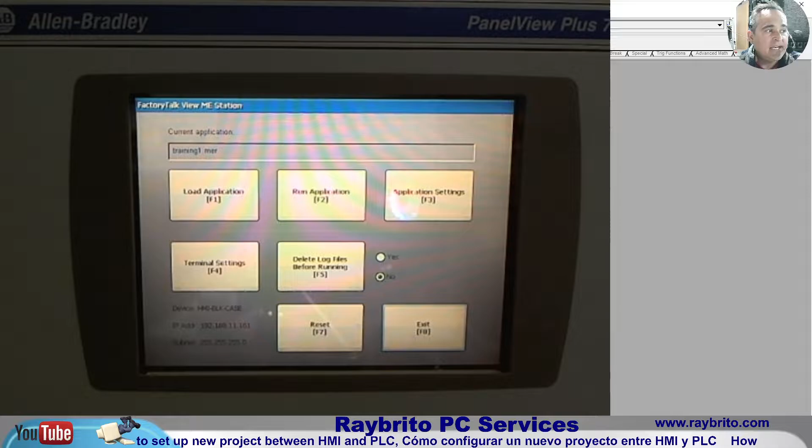Hi, what we're going to be doing today is how to set up a new project between an HMI and a PLC. Of course, it's going to be an Allen Bradley. As you can see in the screen, it's going to be a PanelView Plus 7.

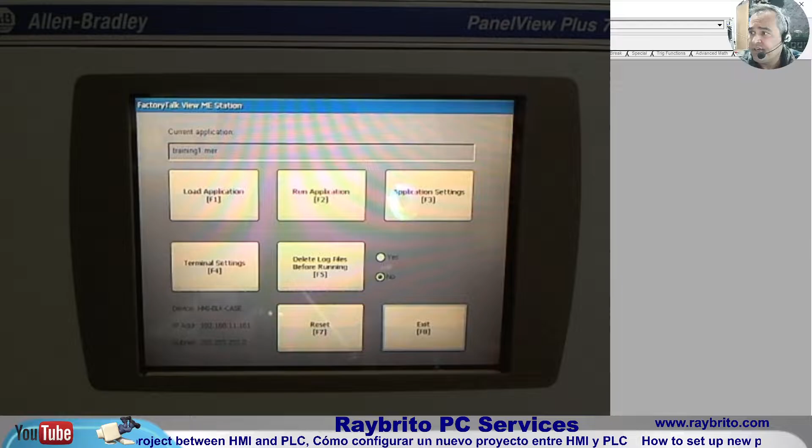Let me remove the HMI screen from there. Okay. Now after I remove that HMI screen, I put my ugly face there. Hey guys, we're going to be working with the program, or the project, or the code I did a couple days back.

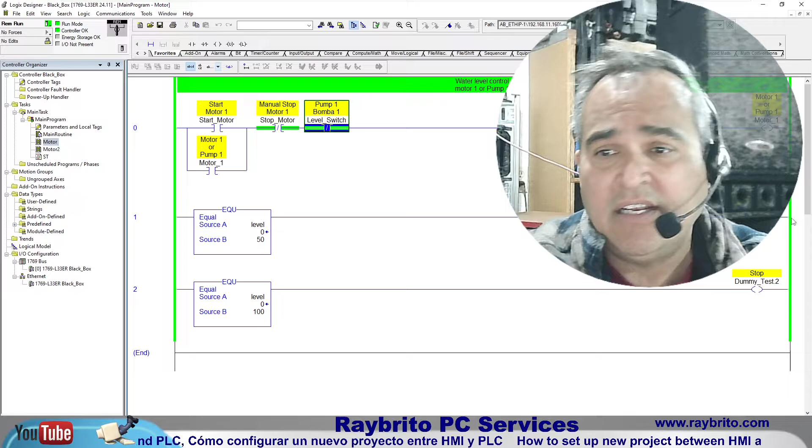We make some changes. The lines at the bottom, they're nothing. So, let's put something. Okay. Let's change this code here a little bit.

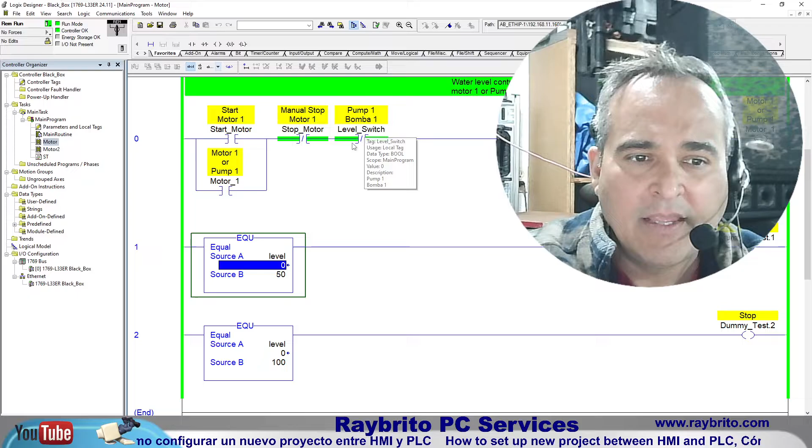Face, ugly face. Let's change the code a little bit. With the level switch here, it's down here. Okay, that way it's a lot easier.

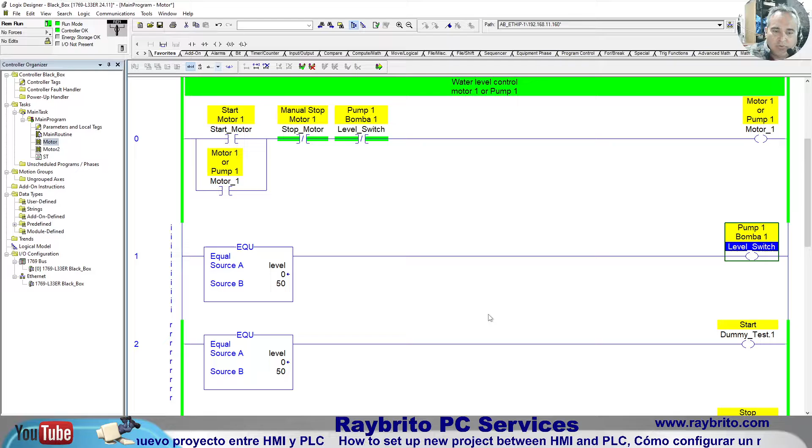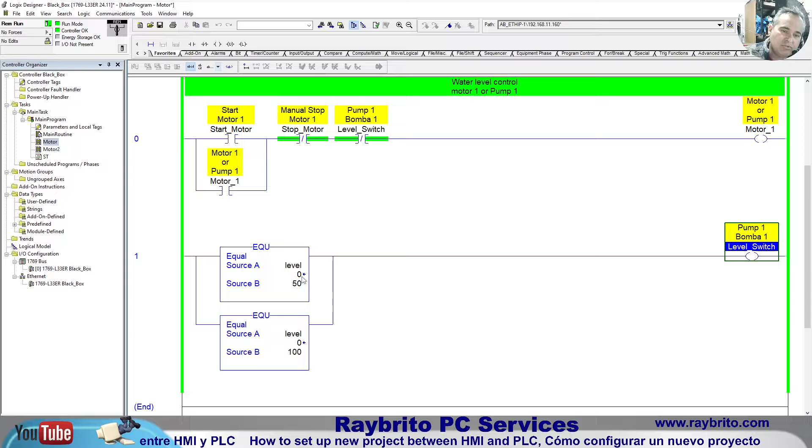Let's put branch, level. Back there. That one. And basically that is all. What I'm going to be doing is something simple. Just mimic. This is the level switch. When the level switch trips, stop the pump. But the main idea here is to use the HMI.

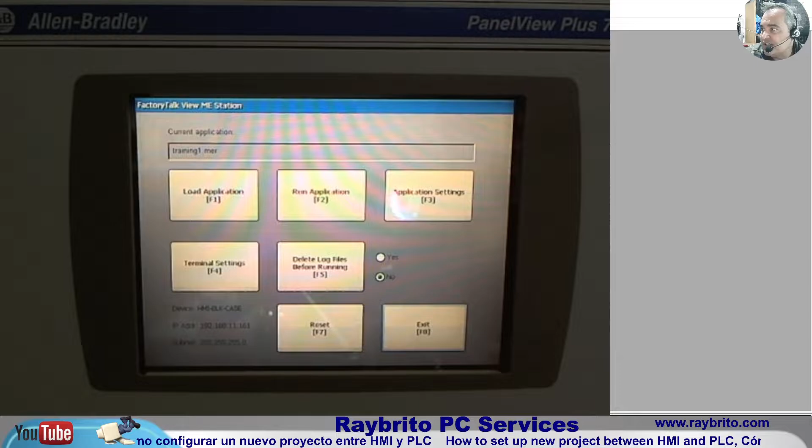How do I do that? Oh, here it is. PanelView Plus 7. You can barely see it in the right corner, it says PanelView Plus 7.

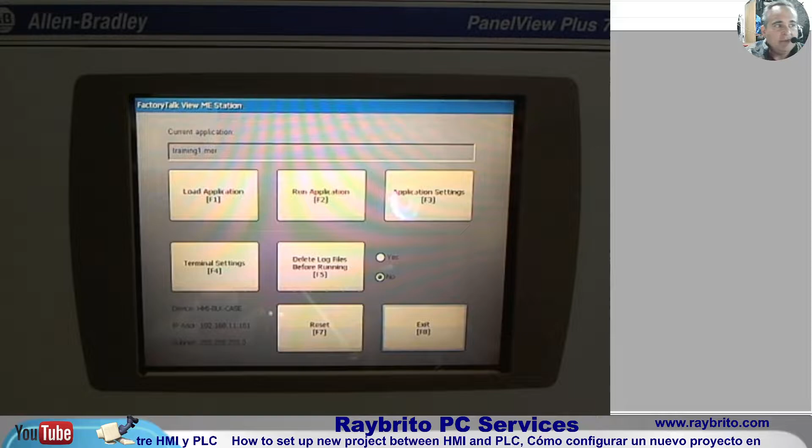Loading. Let's change that screen from there. Okay. There you go. Loading application. There you go. Okay.

What I like to do first is make the communication, which obviously should be done first, right? What we're going to be doing right now is making the communication. Okay, let's click on FactoryTalk Linx.

Communication setup. To prepare the communication, we double-click on setup, left button. Let's create a new application. Finish. Here we have the communication tree.

Let's click on the plus, then we will see all the devices. We've got to give it some time, okay? Sometimes it takes about a minute to load everything. Put this there. We already know that this is 161; how I know that is because back in my HMI here... Sorry, I didn't put the screen.

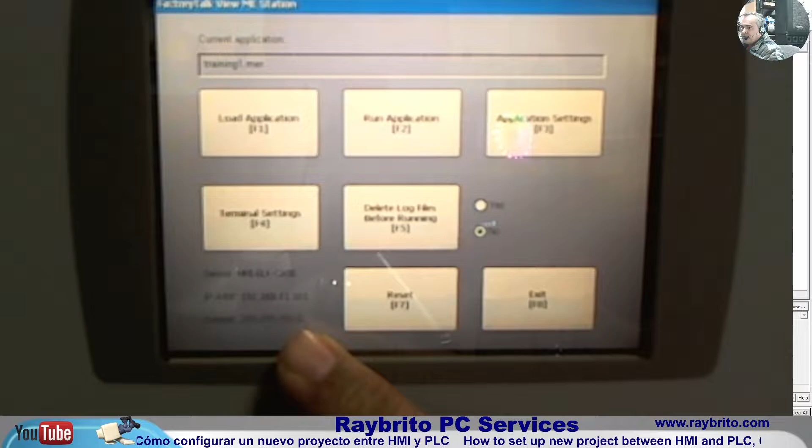Okay, back here, we got a 161, okay.

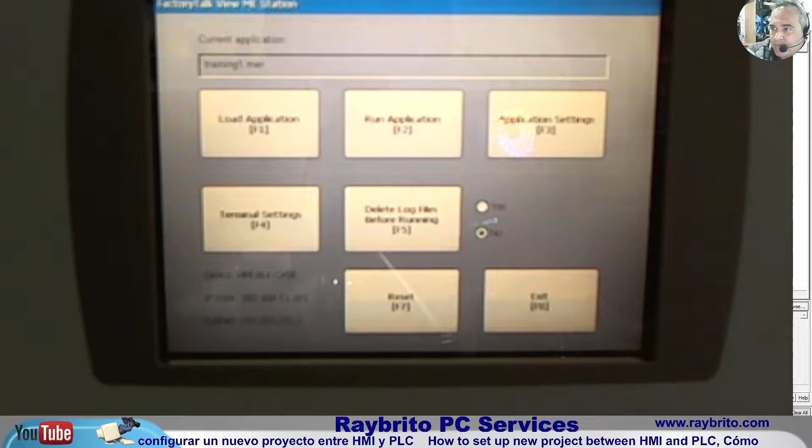As we know, I got two HMIs right now, the 152 and the 161. But we're going to be working in the 700. The other one is a 1000.

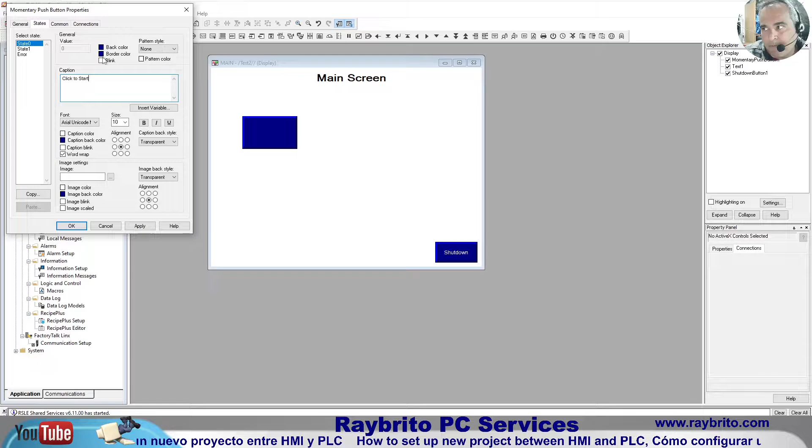0 is going to be the blue. Green is going to be state 1. Let's make it bold. Let's leave it 10. But let's change the color. Let's put it black. That way it's easy on our eyes. State 0 is fine. Let's just put it bold. There it goes. Okay. Now we got started.

And now let's make the communication back here. If we want to change the size, you change it here. Ok.

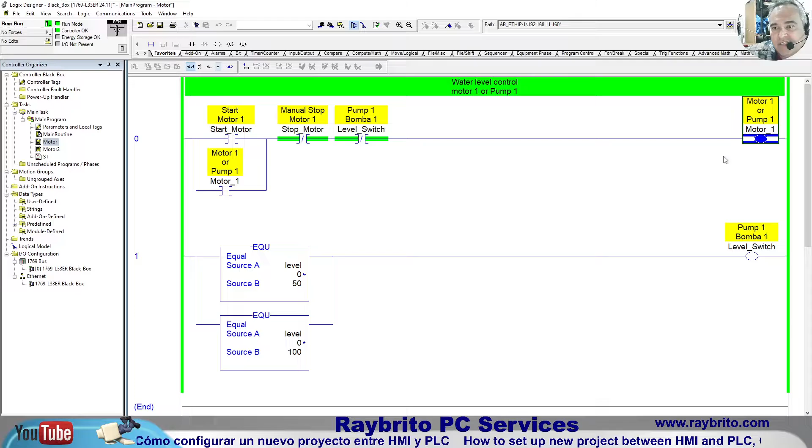Motor 1. Now it's motor 1. That is what's going to be my feedback, okay? Apply. Okay. Now, let's minimize this one a bit.

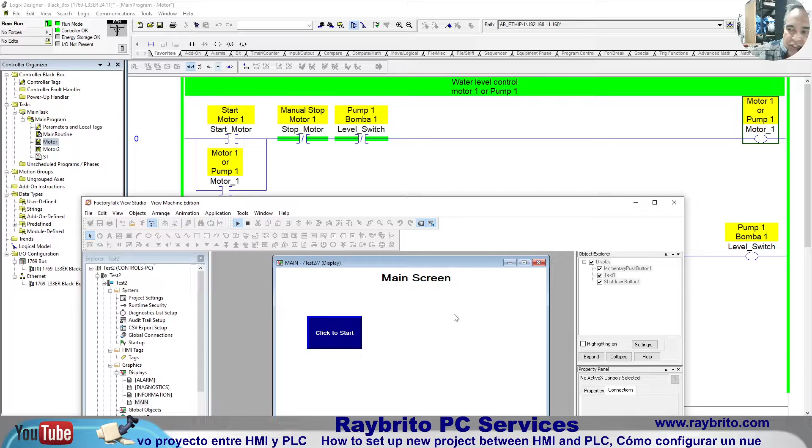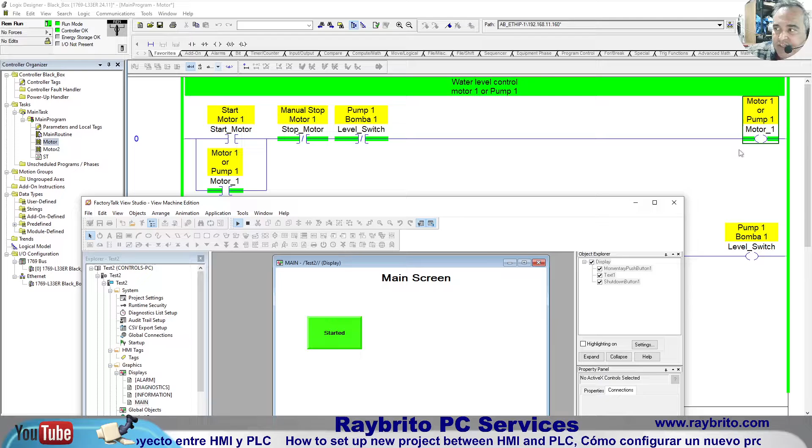And play. Now we hit play. We're ready to go. We save it. Good to go. Now this is for testing. Okay, let's click start. Bingo. You can see here it started. Okay. It doesn't matter if we click it again, because it's already started.

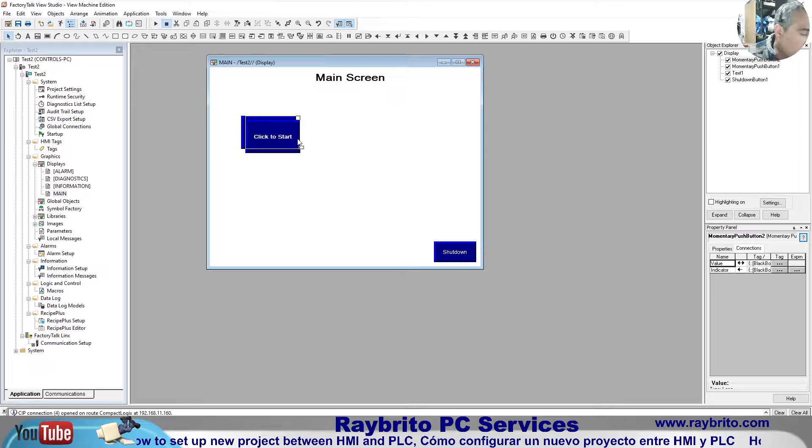What I'm doing here is something simple. I'm keeping the mouse over the icon I want to move. I'm pressing shift and the arrows up and down or left and right to move it, okay? Now double click on it.

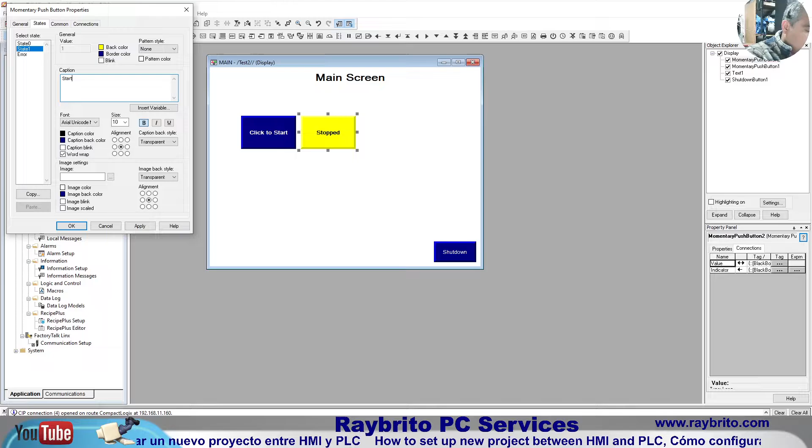Let's make the communication. This is the feedback. Let's leave it there. Let's delete that one. We're going to be doing motor 2. Stop motor 2. How I know that? Stop motor. Okay. Stop motor. Always double check, okay? Stop motor. There you go. Apply. Okay.

Now let's test it again. Save. Remember, always save your work, okay? Click play. Motor started. Now stop. Now we need the little motor here, okay?

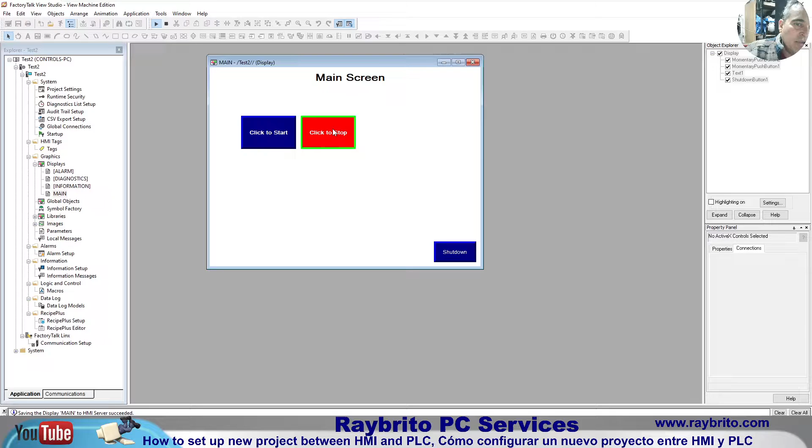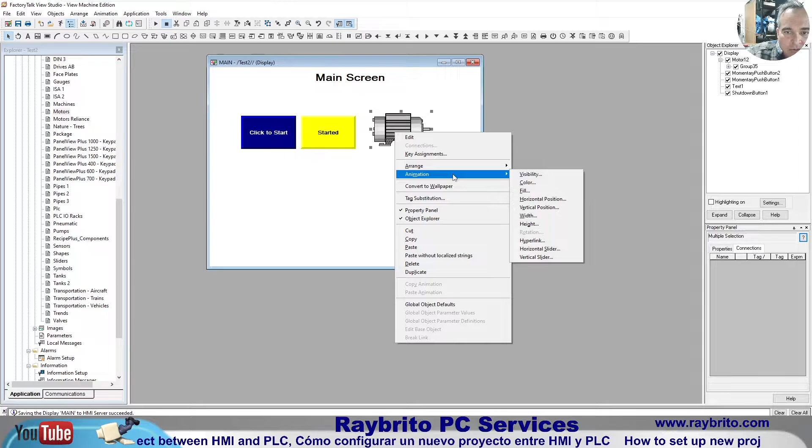In case we're gonna add some flavor, let's put the little motor here, okay? Let's go down here, library. Let's find motors. Double click on it. Let's grab this one here and let's drop it there. And close it. Okay. Let's do right click. Animation. Let's see what happens. Nothing happens, okay? Let's do animation, okay?

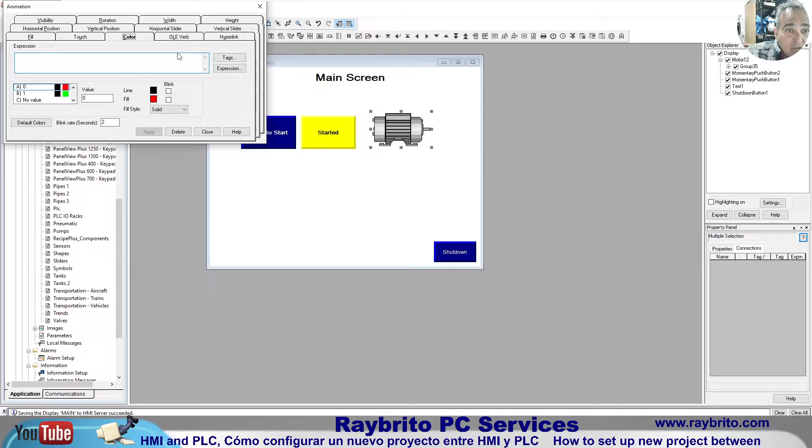Visibility. Let's go to color. Let's find the tag. The tag is going to be motor 1. Click OK.

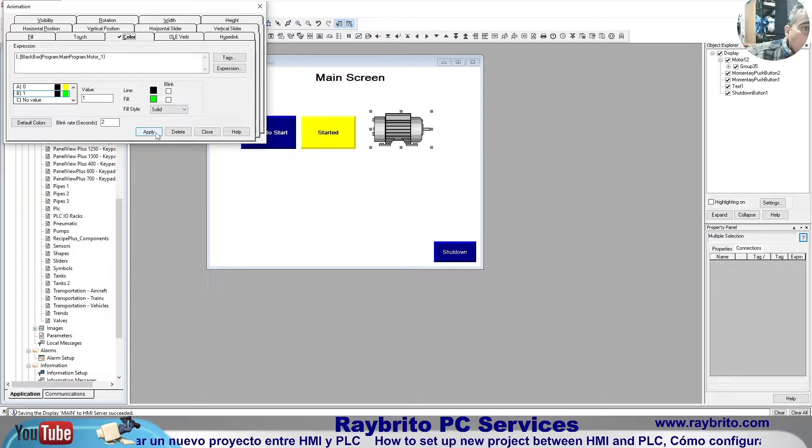Here we change the colors. When it's stopped, let's put it yellow. When it's running, at 1, green. Okay. Apply, close. Let's test it, see it works.

Remember, if you keep forgetting about saving it, just remember this. What Jesus does. Saves. Save your program. Always save your code, save your work, okay? It only takes a second.

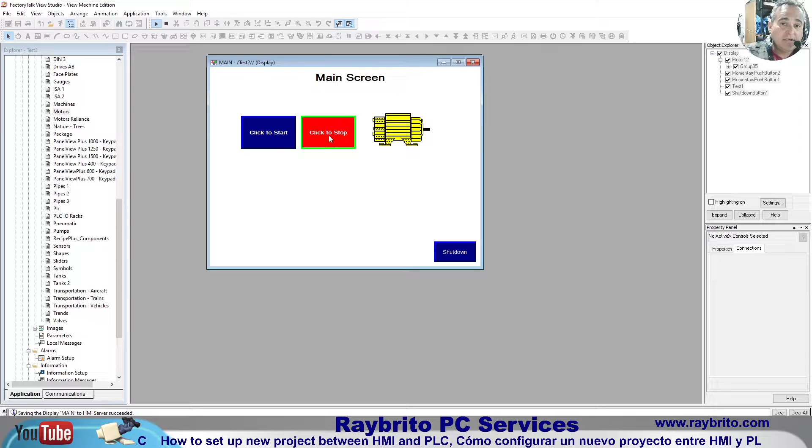That simple and easy is this. Nothing more than that. Okay? Start, stop. Okay? You can see it here. Simple and easy. Start, stop, start, stop. When it's green, it's because it started. Otherwise, it's stop. We can see it here.

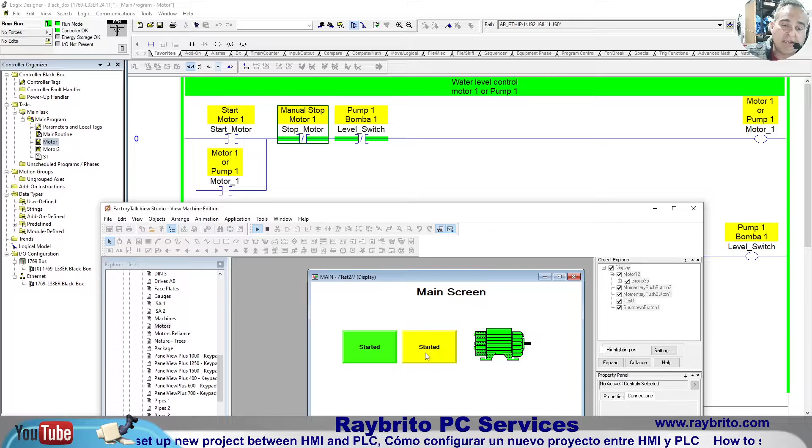Okay. Now, let's say we want to add more things, but we don't want the buttons to be showing here in the screen. Let's say too big, many things. Let's do some animation. We want to see this button only when... let's do animation. Visibility is what we're going to do.

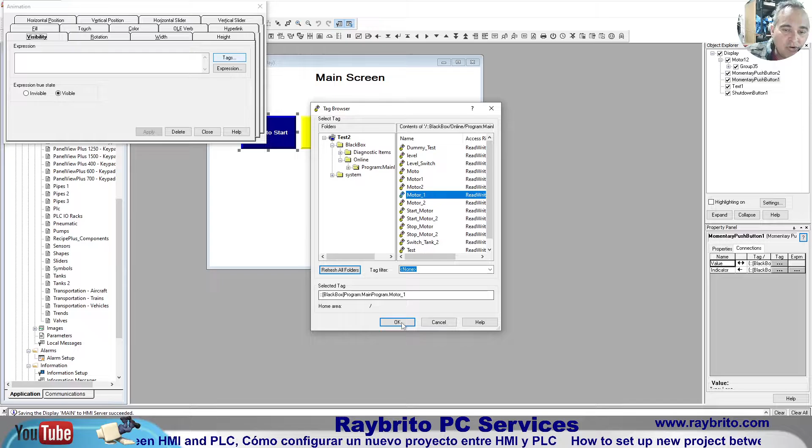Motor 1. When the motor is stopped, we want that button to be visible, right? Then let's use motor 1. Visibility. When this one equals 1, see, again, once again, I got the wrong keyboard.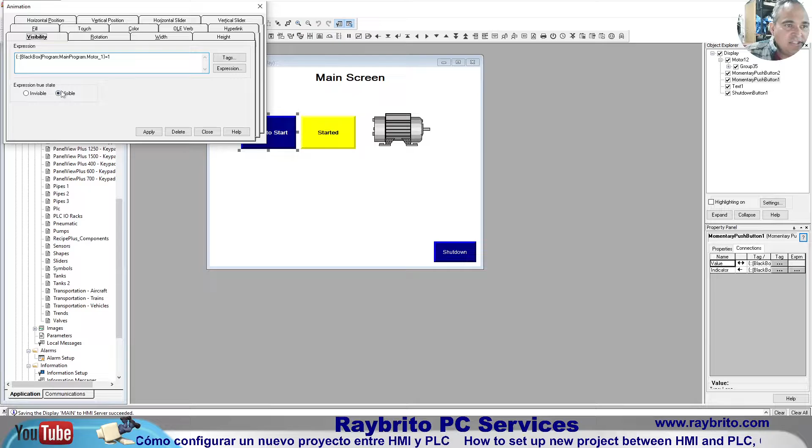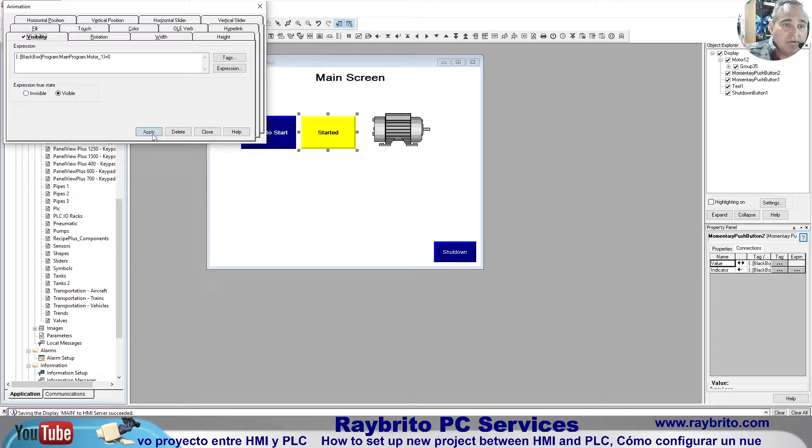When equals 1, we want it to be visible, okay? Close. This one, we want it to be visible only when it's running. Otherwise, we don't want to see it. That way, they don't have a lot of choices. Then we wanted to make it visible. Motor 1 equals 1. This one is going to be invisible. 1. If we can change it, we can put 0. Make it visible. Doesn't matter. It's the same. Okay. Now let's see it works.

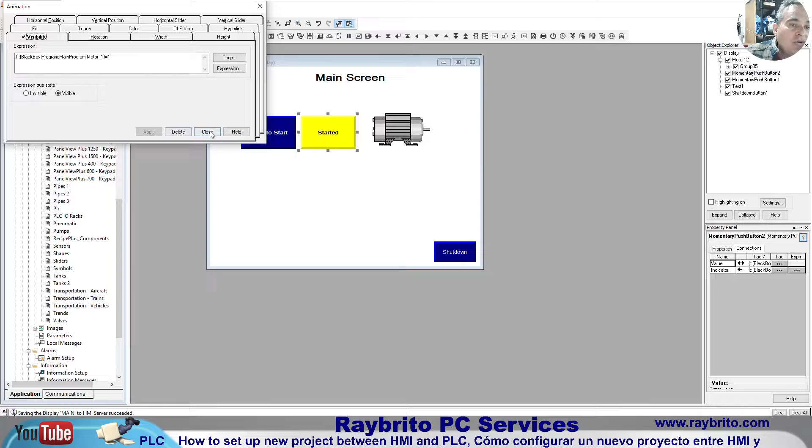Okay. Now, let's change colors. Properties. Now let's make it green when it's off. Okay. Letters black. Now, see it. Now this one, let's change it to.

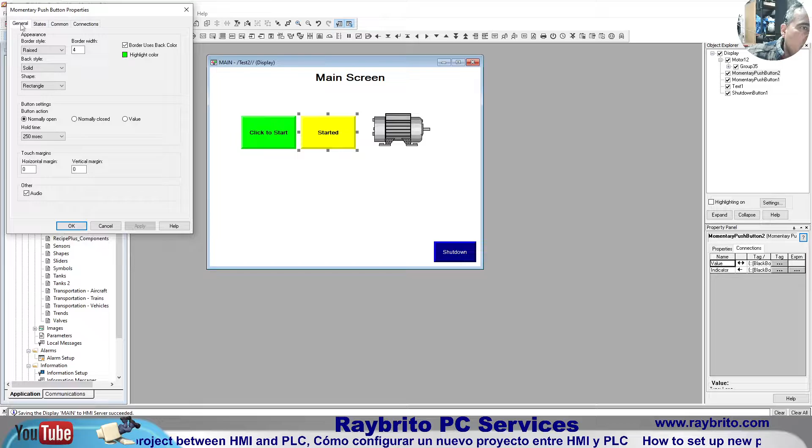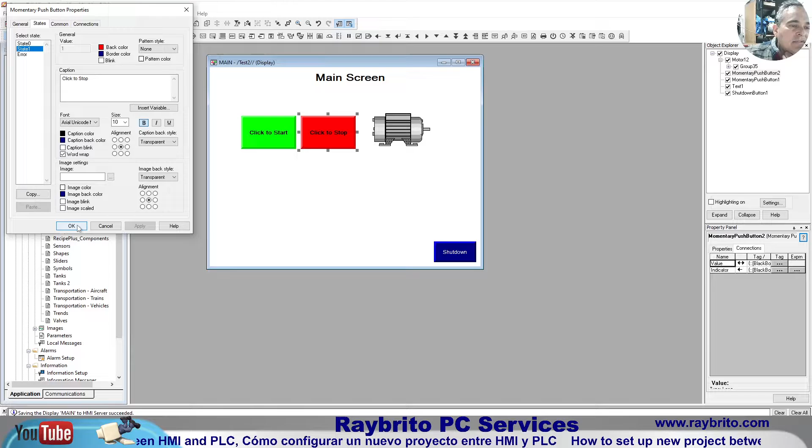Let's make it red. Okay, apply. Save. Now, shift and left arrow.

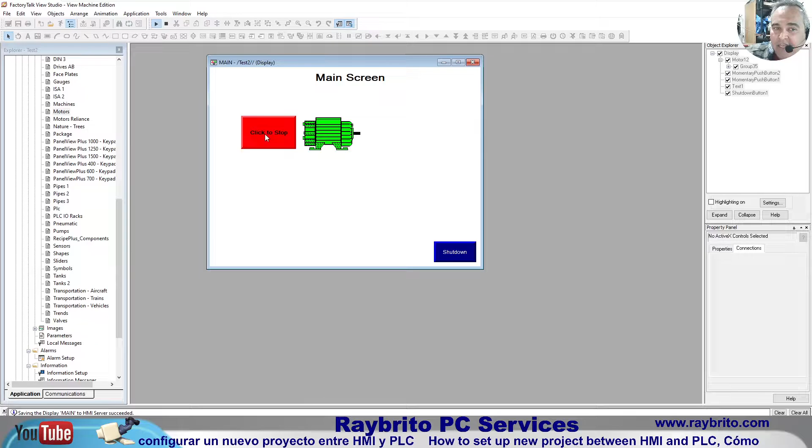Okay. We press shift, then we hold it down, then we press left arrow to move it over to the other one. That way you can see only one. Then we just move the motor. Let's save it. And let's play it. Motor is running. I got only one button. I'll stop. That is the beauty of the animation.

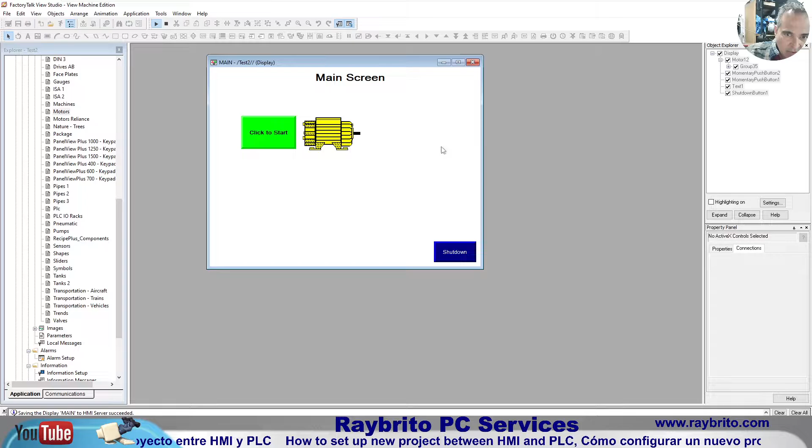Create runtime application. Back here it's asking me what is the rev of my HMI. In my case, I got rev 9. How do I know it's rev 9? Simple, easy. Let's check the HMI.

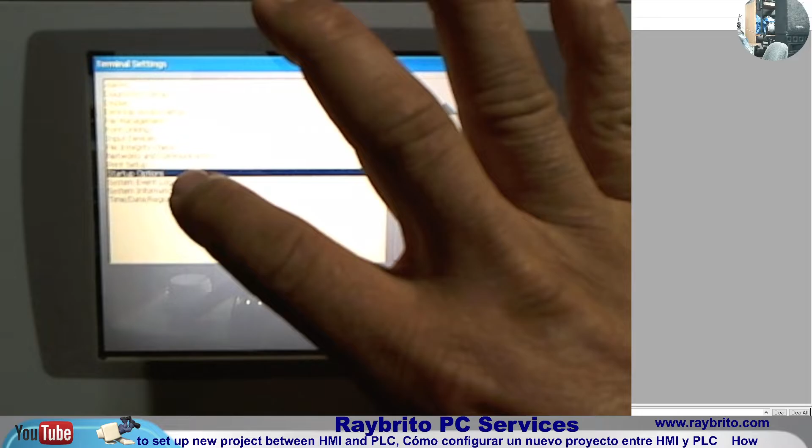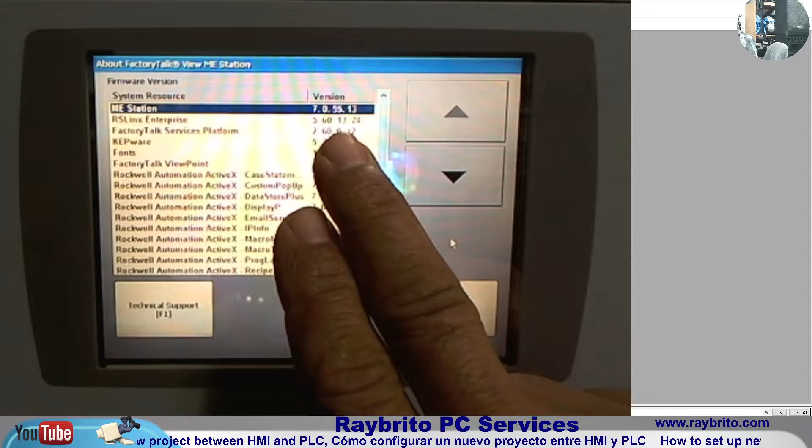Let's see it here, okay. We come to terminal settings. We scroll down to system information, or we use touch there. Then in system information we hit enter. And if I don't remember, it's FactoryTalk View, very first one. And actually it's 7. Okay, you can see here rev 7, not 9, rev 7.

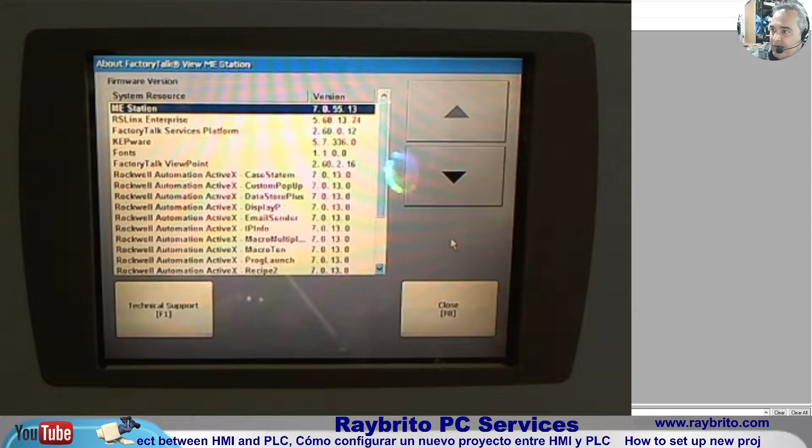Okay, so since it's rev 7, minimize the screen a little bit. Okay, back here we are going to select 7. Okay, there is 9, 8.20, 8.10, 8, 7. Okay, for name let's put test 2, same name. Let's hit save. Program is working. Open or convert the runtime application in FactoryTalk View version 9 and earlier.

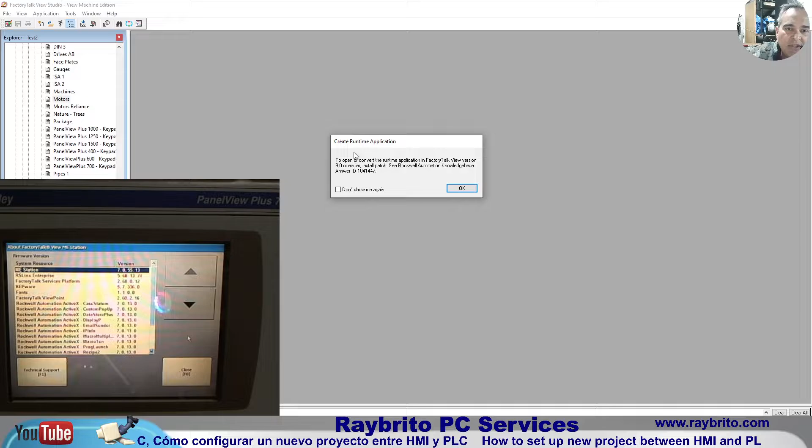Here it's making the file. We just click OK. We don't really care about what it is.

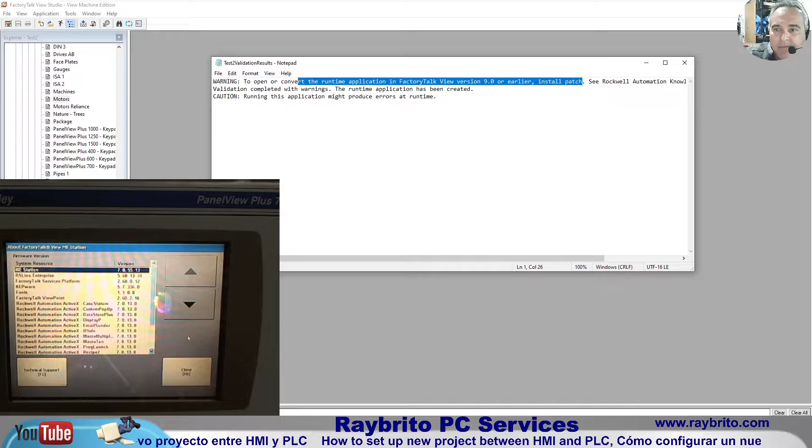We get the warning. Basically, this warning is telling me that it was created in a version 9 or earlier. Okay, download the patch. Okay.

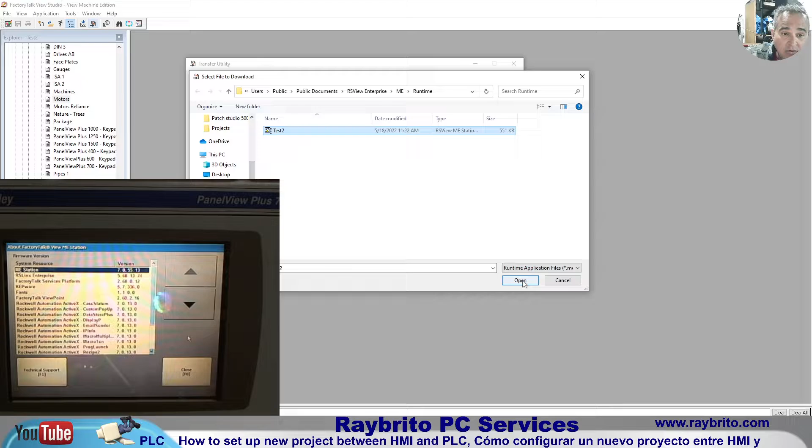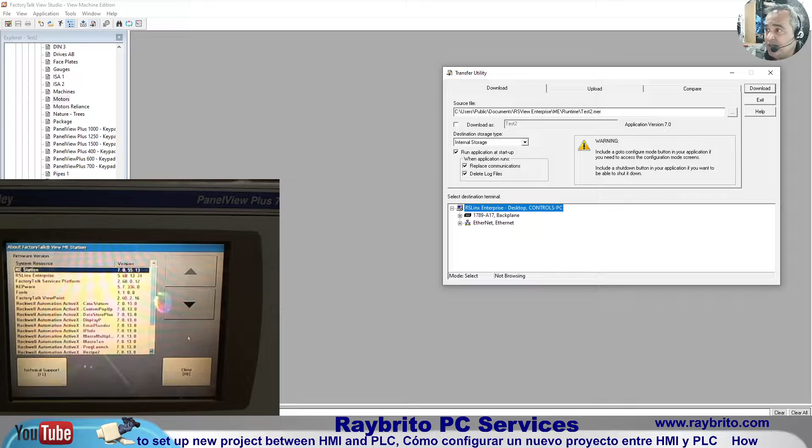Okay. Back here. That way we can see what is going to be happening. We start this thing. Back here, we're going to select the HMI. Remember, it's the 161. Once again, how I know that? Let's go back to the HMI. Close, close, close. Right there, 161.

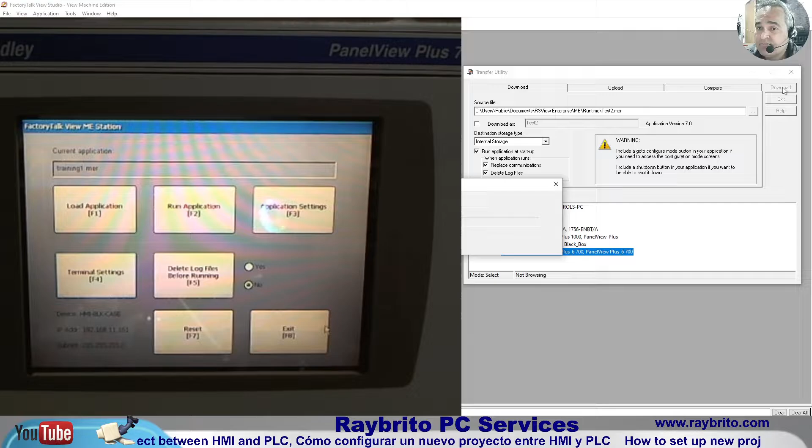Okay, 161. Yes, the only thing we gotta do is hit download. Here is a pop-up. It's telling me that it's transferring. As you can see, the HMI right now is transferring. The utility gave me a sign that says, hey, downloaded. Hit escape and that's it. Now let's go back here. Let's make the screen bigger. Okay, now we make the screen bigger. Let's wait for it to reboot.

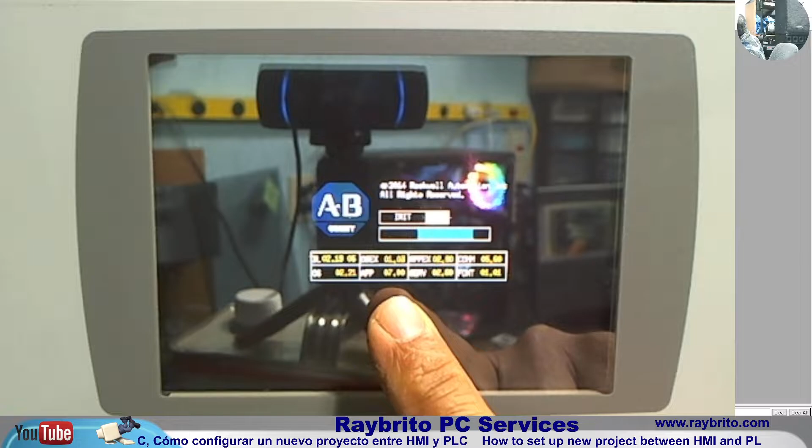Okay. Back here you guys can see what revision it is, okay? Just reboot your HMI, and here it tells us what revision it is. In this case revision 7. It will tell you what revision it is, okay? 7. Just reboot your screen, wait for the screens to go by, it's gotta do all the diagnostics, all the checks, and boom, it's there.

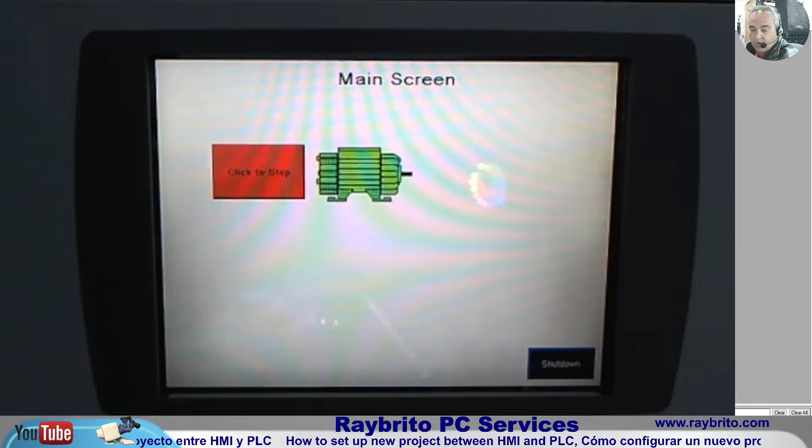And there it is. It's loading. Loading. Bingo. Got it. Now, let's see. It works. There it is. Start, stop, start, stop, start, stop. Now let's see how it works on the code, okay? See how it works in the PLC code.

Let's make it a little small. Here the HMI. Now let's pull the PLC code. Make it a little bit bigger because we have space, there it is. Okay. Right now it's telling me that the motor is running and my only option is stop. Correct? Okay.

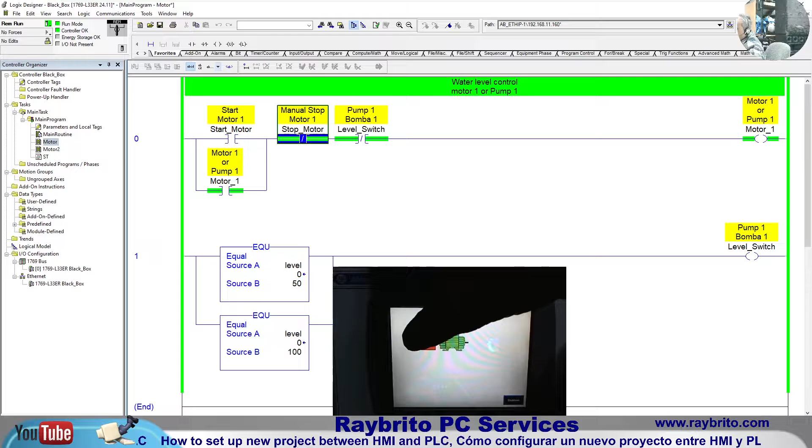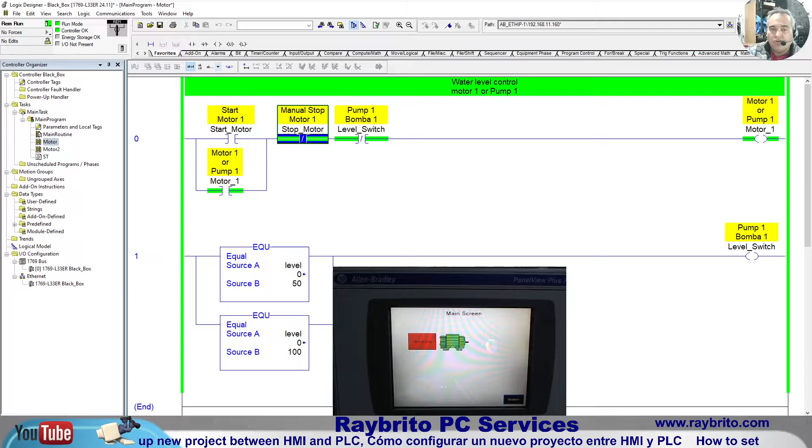Now with my ugly finger, what I'm going to do is press stop. Okay. And there it is. Check the code. Code is changing. They are communicating. Tracking. Okay. Start, stop, start, stop. We start it, we stop it. This is the communication. We got the communication going right now. Everything is good. Now, let's say that we want to write something to the PLC.

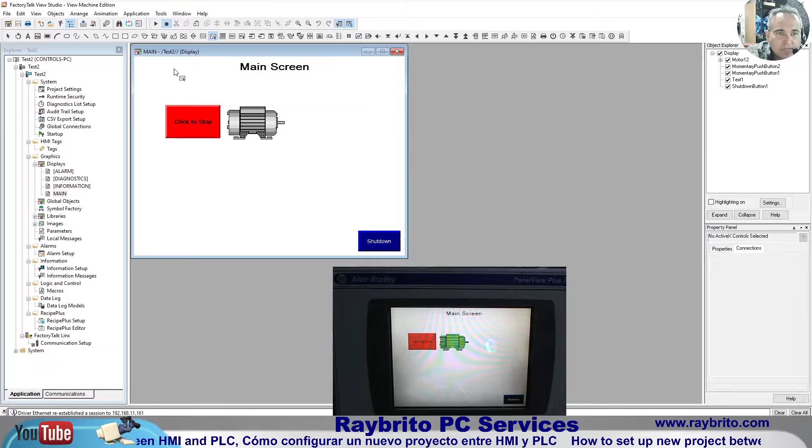Then what we gotta do is go back to FactoryTalk View Studio. Let's open main. Let's go to range. Objects is going to be an input, numeric and string input. Okay. We put it here. And 4 digits, label.

Connections tag. We go to the tag for the connection. We'll tell it to go to test. Let's select test. See. There. Okay. There is test. Select the test. Let's click OK. That is the communication. Okay.

If we want to get an exponential, if we want to hit enter to go there, if we want to use the handshake, minimum, maximum, all that stuff, we can do it there. Numeric. Let's change this one to 100. 0 to 100. We got keypad, scratchpad, none. Let's use the keypad, okay? Apply.

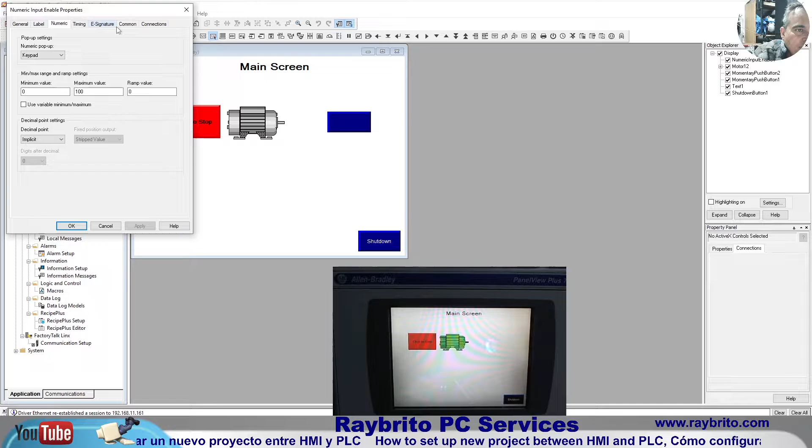Once again, you can change the size here. 100. Look what is happening. It got a little bit smaller, okay? You can see there. Okay, now again, label. We hit that one. Okay, let me show you, then I'll keep going. Let's hit play.

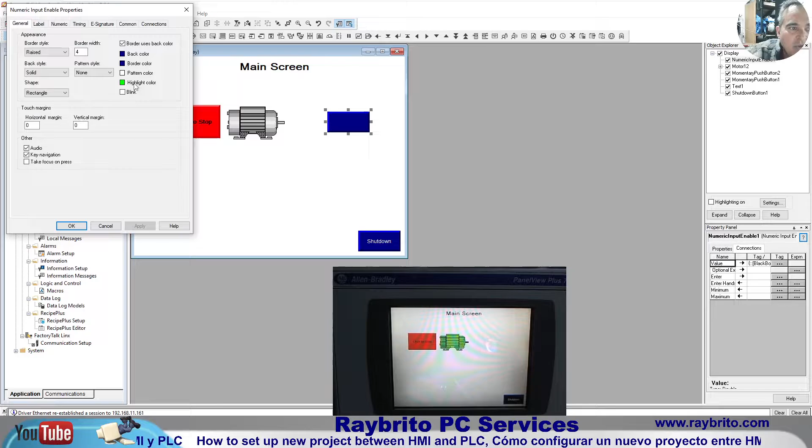Right now, click there. Let's put 1. Let's put 10. We don't have any feedback. We don't see anything. Okay, we are not reading anything. But if we look at the PLC code, what? Let's go back. What happened here? Let's see what happened here. Oopsie.

I attached that one to the wrong level.

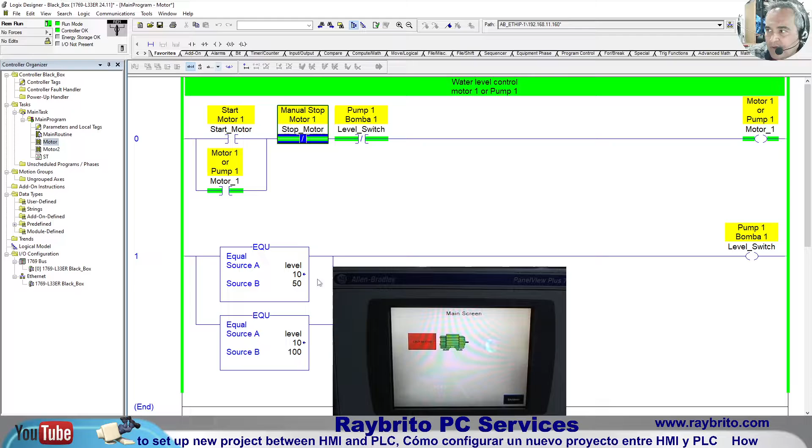Let's say we want to see something back. Let's put it here. Insert variable.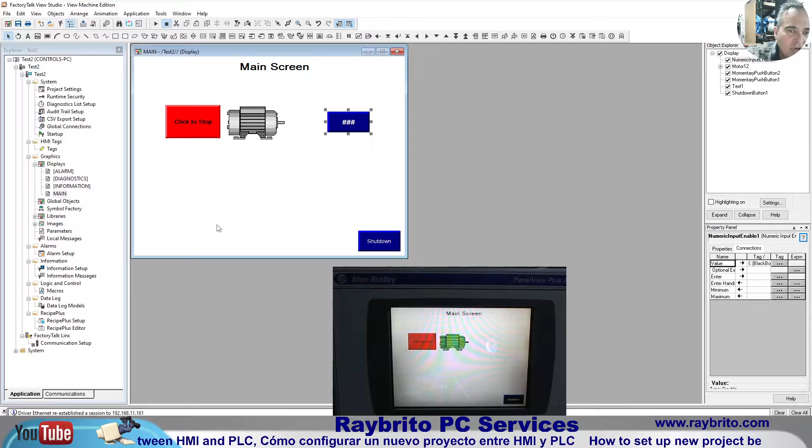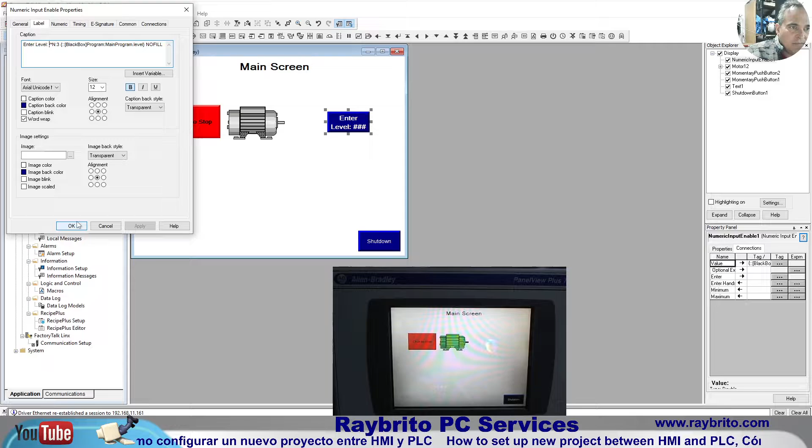Damos correr. Now we got the feedback. Now, say it's kind of simple. Okay. But I want something to show me here more than that. Okay. Let's put here enter level. Let's see. Let's make this one 12.

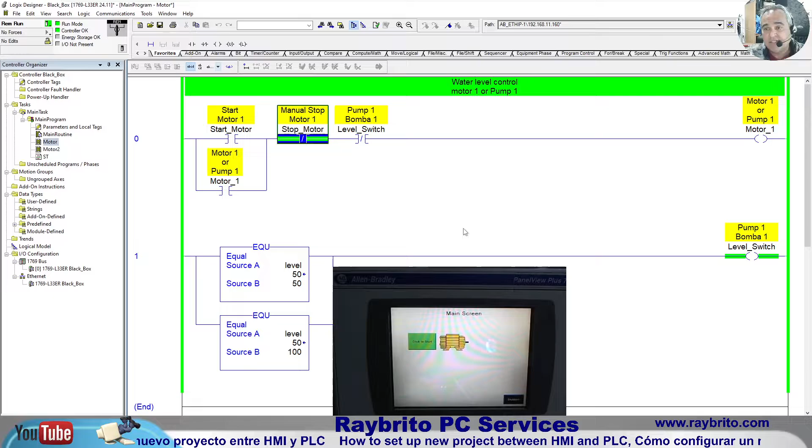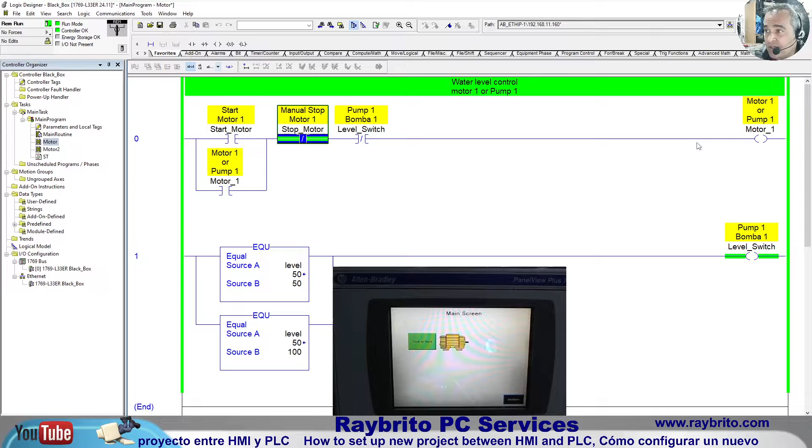We can either leave this one as an enter level, or we can use one actual level. And you can see here, I want it to be 50. Now it's 50. This one on, this one taps. When the level hits 50, on. Enable is on. Switch stops the level. And that is how you use write a number.

Next videos we're going to be seeing strings, and eventually we're going to do one scanner. Okay, everything starts from here. We're going to be using a scanner to scan barcodes, using some other functions. That way we can do some kind of tracking, or at least we learn a little bit on how to use the scanner in case it's needed.

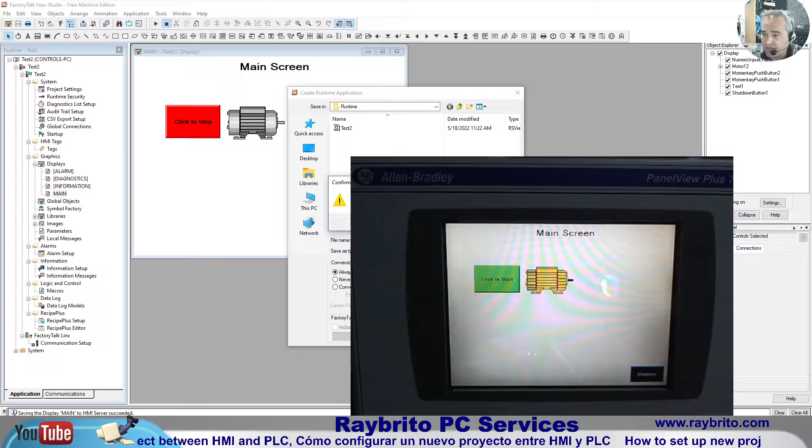It's asking me if I want to rewrite it. I say yes, go for it, I don't care. I know I'm doing it. Warnings, of course, are going to be the ones we had earlier.

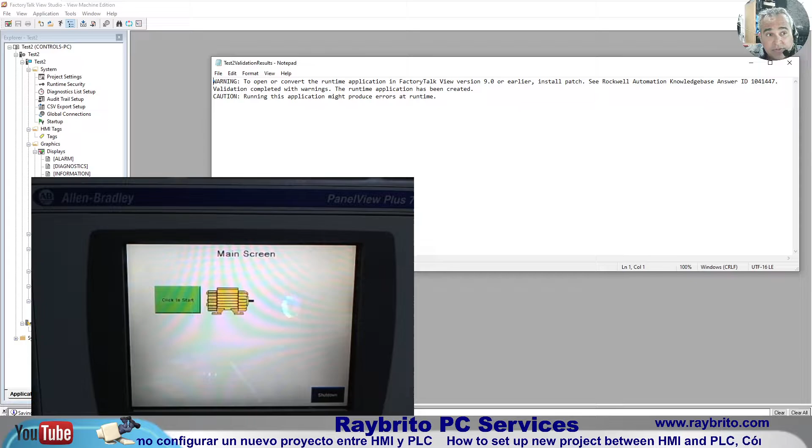Let's wait for it to finish. Let me bring back my... Okay, it's still working. Yes. Warnings, as I said, the same warnings.

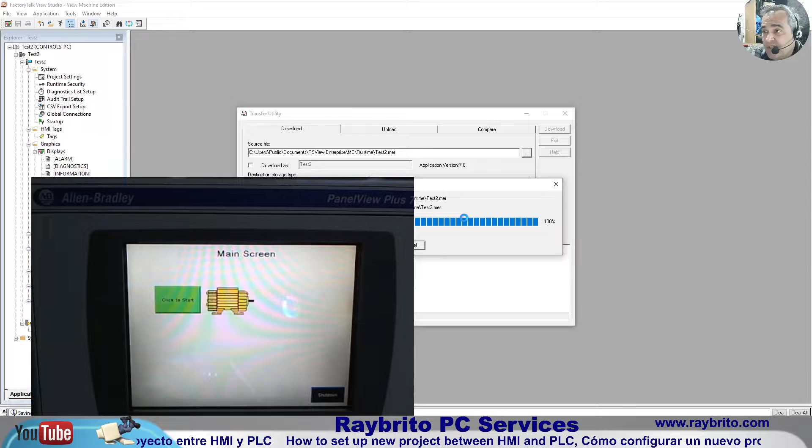Let's put a little bit of attention to the screen. I'm going to download it. Then the screen is going to do exactly the same thing it did before. Going to turn off, start, reboot, and bla bla bla.

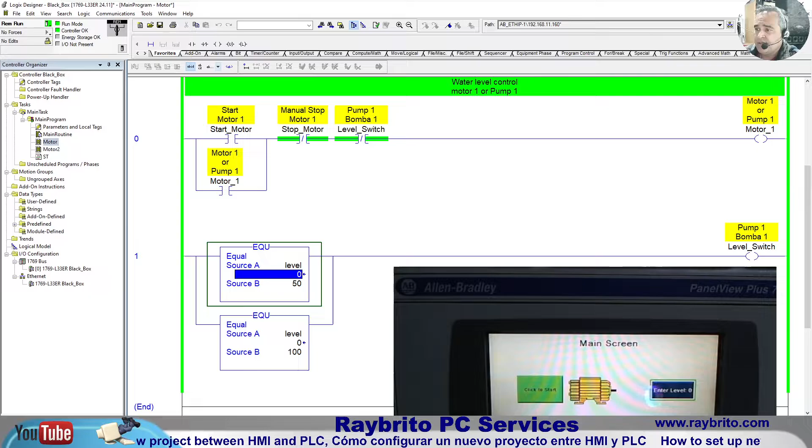And there it is. Here you guys have it, okay? Now let's call the PLC code. Inside. Okay, hit start. Got started. Okay. Size of the screen. Now let's change the level. And you can see here change.

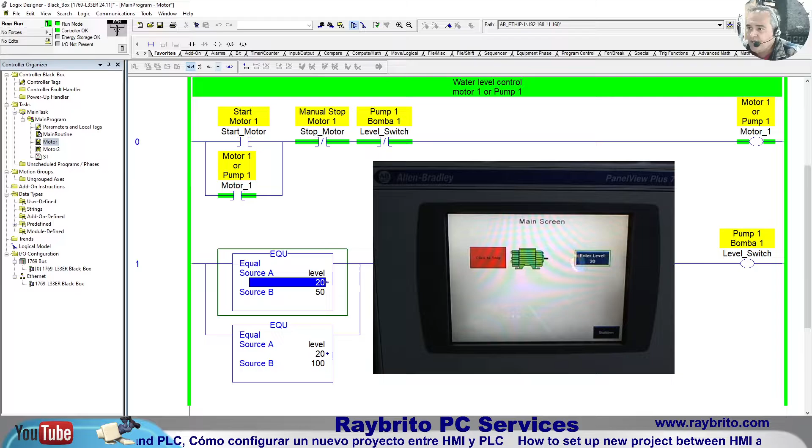Let's stop it. And bingo.